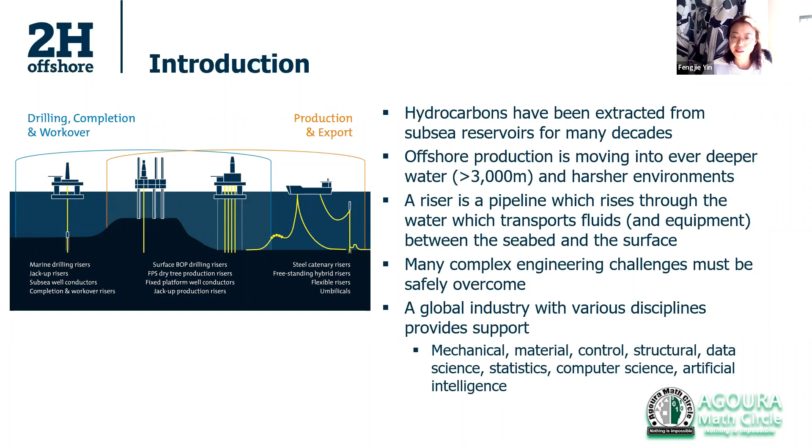Talking about the offshore oil and gas industry, people may or may not have seen some of the offshore platforms. You can see some of the offshore platform pictures on the left side, but I'm pretty sure everybody has used the end product of offshore oil and gas when getting gas from a gas station.

First, the government sells exploration licenses or leases to oil companies, which we call operators. Then the oil company is required to shoot seismic surveys or drill exploration wells within an agreed time frame. And if oil and gas is discovered, the oil companies will normally form partnerships to undertake development.

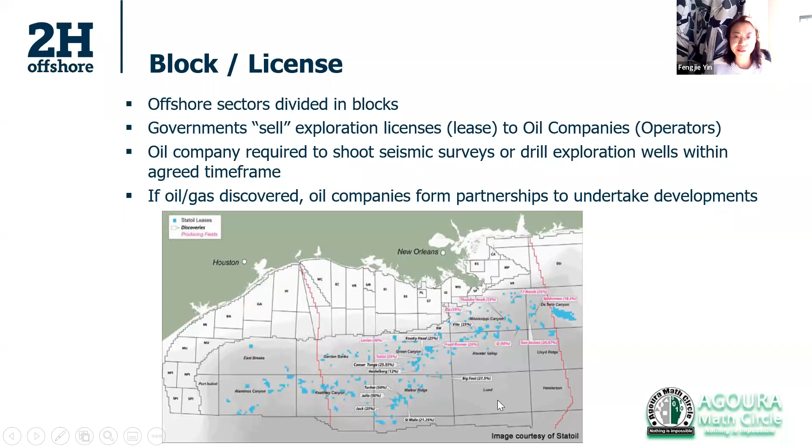You can see the different blocks divided in the Gulf of Mexico area, and the blue dots are the different platforms in this area. You can see lots of development in the Gulf of Mexico.

Talking about basic reservoir geology, although this is not one of my expertise, just a very brief introduction, because this is the very first piece of the jigsaw or puzzle. The hydrocarbons are found in reservoirs beneath the seabed.

It may be some distance below the seabed, and it may spread across a large area. So first, seismic analysis needs to be conducted to identify potential locations which may have oil and gas findings. Lots of math goes into this analysis.

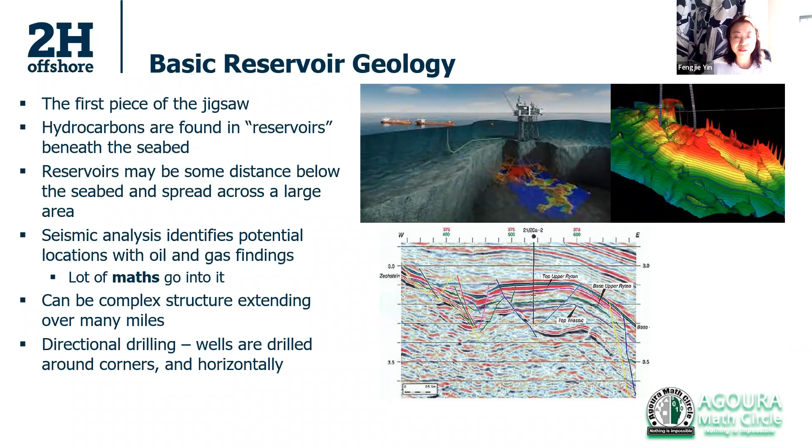It can be a complex structure extending over many, many miles. And currently there is directional drilling, where wells are drilled all around the corners and even horizontally.

Talking about the history of the offshore industry: at first, in the very beginning, offshore wells were first drilled in shallow water in the Gulf of Mexico using fixed platforms, because at the time it was all shallow water. The technology was later extended to the North Sea in the 1970s and all around the world.

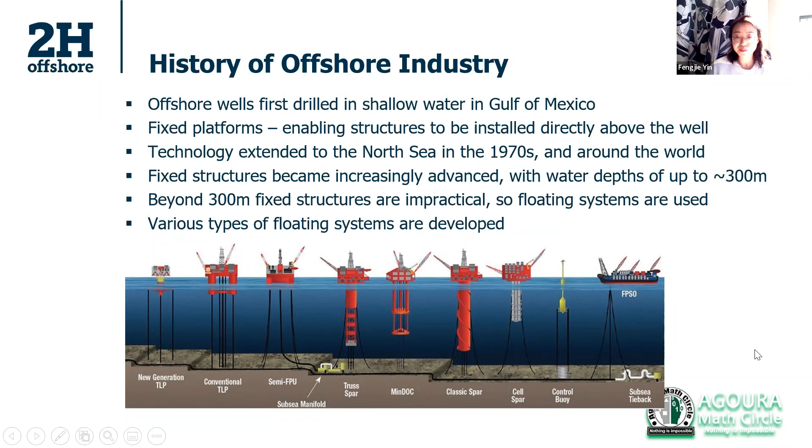A little more about what a riser is, and what my day-to-day life is like working on its design. The subsea riser is a pipeline that connects a well at the seabed to a vessel or platform at the surface.

Now offshore wells are found in locations with deeper water depths, including water depths of up to 3,000 meters, in very severe weather conditions including wind, ocean currents, and wave heights as high as 20 meters. The riser must be able to safely withstand all sorts of complex dynamic loading over the life of the field, as long as it is still producing.

There are normally two stages of developing a subsea reservoir. First is exploration to find oil and gas, and the second is production. In the exploration stage, it normally requires drilling wells below the seabed, typically using an existing drilling riser.

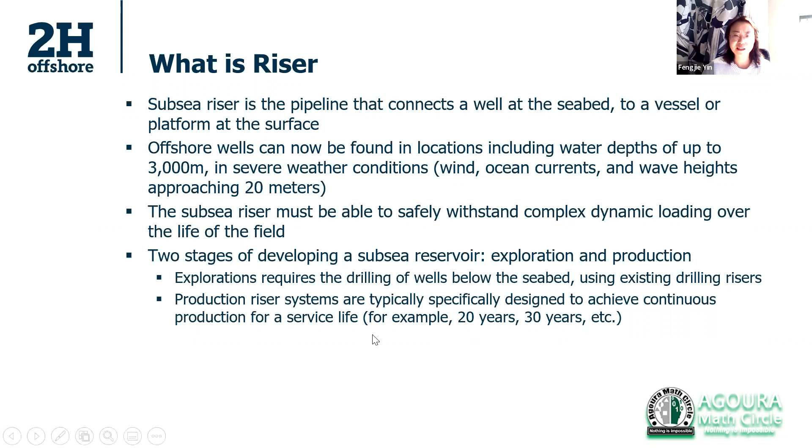I myself focus more on production riser systems, which are typically specifically designed for the specific site to achieve continuous production for a service life, for example, 20, 30 years or even longer.

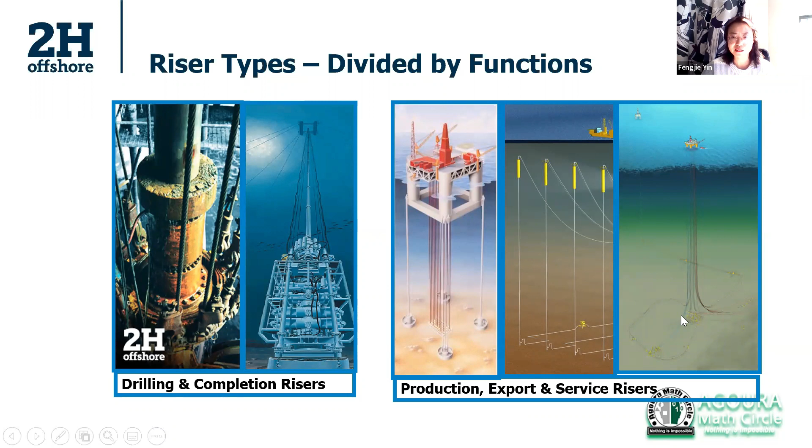There are different types of risers for these two different stages. In the drilling exploration stage, we call it a drilling riser. In the production stage, we have production, export, and service risers, divided by different functions.

To connect to different surface facilities or floaters, there are the regular boat-shaped floaters, called FPSOs, and other types of floaters like TLP, semi-submersible, and spar, each selected for purposes specific to the site.

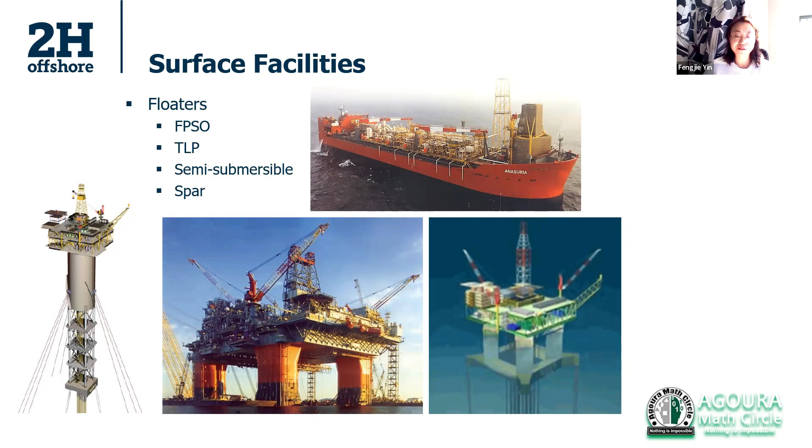There are also different types of production riser systems. One on the left side is the top tension riser, and there's the steel catenary riser or flexible catenary riser, where the shape of the riser is a catenary shape.

Nowadays, a steel lazy wave shape or flexible lazy wave riser is used more and more. Buoyancy is put in the middle section of the riser, which is installed or designed to mitigate the motion transferred from the floater to the touchdown point of the riser on the seabed, helping achieve better strength and fatigue performance.

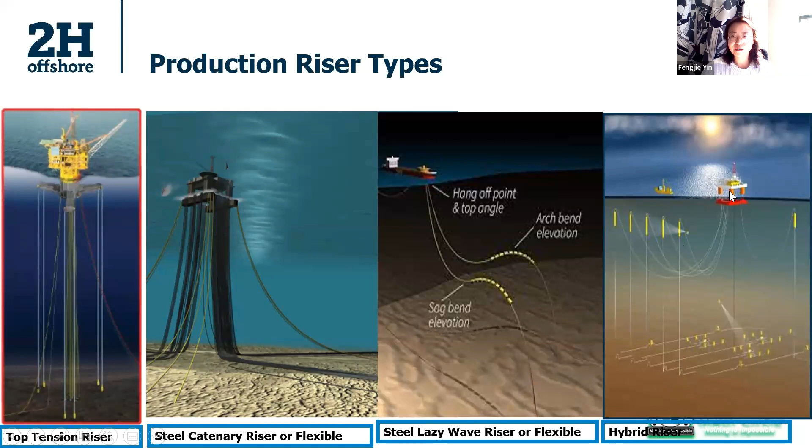There are other types of risers which we call hybrid risers. It's a hybrid combination of a top tension steel part, with buoyancy that can be put in the middle, and a flexible line connecting to the floater.

There are various material selections corresponding to different connections. When we choose high strength steel, we normally use a threaded and coupled connection because welding is not that easy.

There are also welded connections, and there are materials we call flexible pipe, with a combination of layers of steel and composite to serve different purposes.

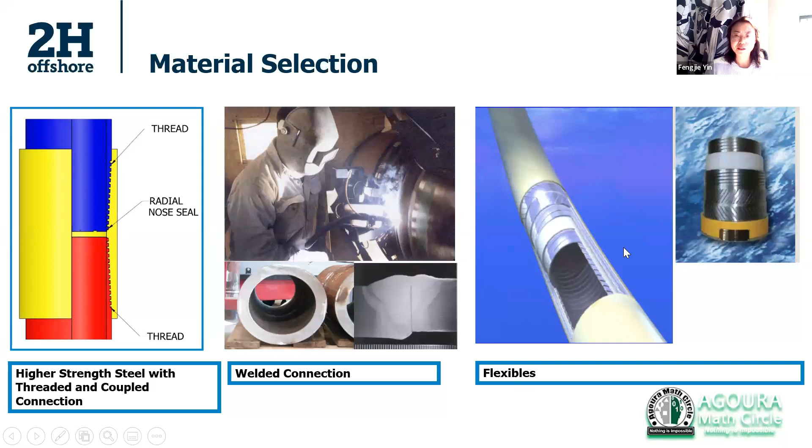There are lots of design challenges in the riser system. First of all, the big chunk of riser pipe will result in significant weight putting on the whole system. And it's a slender, unsupported structure, which is vulnerable to buckling.

And there are also complex dynamic loading, including the environment exposed to wind, wave, and current from metocean data. And the motion of the surface vessel is transferred to the whole system, which may result in high extreme stress and also cyclic loading, resulting in fatigue damage.

Probably you may not know what fatigue is, because fatigue is actually a big concern in riser design. It's easy to explain: if you put a piece of wire, like a metal wire, and you bend it back and forth, this will result in fatigue damage instead of overstress. After a few times, you may see this wire fail because of fatigue damage.

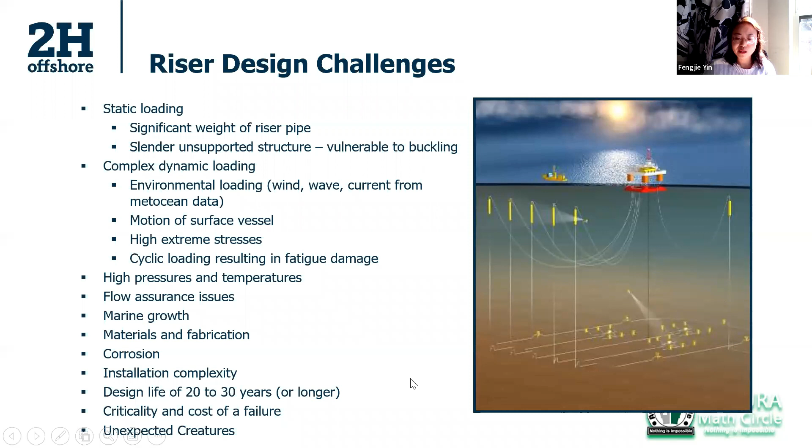There are also some unexpected creatures, which I'm going to show in some of my later slides, which are not designed for.

The key drivers of the riser design, first of all, is the strength behavior. Second is the fatigue behavior, because it needs to withstand the design life of 20 to 30 years, as I mentioned. The fatigue sources may include wave motion and vortex-induced vibration, or vessel-induced motion and slugging, and installation-resulted fatigue damage.

Another key driver that needs to be taken into account is clashing or interference, which needs to consider the riser clashing with the adjacent riser structure, and clashing or interference with the adjacent hull structure or vessel structure.

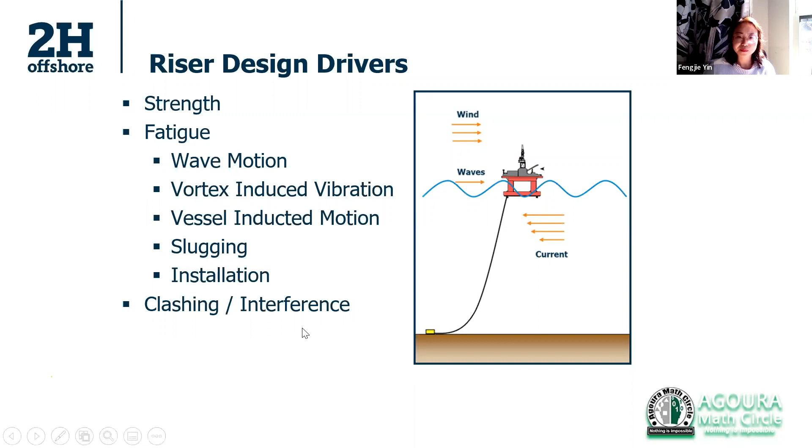What is vortex-induced vibration? In riser design, you may not be familiar with it, but it is basically a slender pipe structure. If you observe carefully the antenna of the car during strong wind, when the strong wind is blowing, the antenna will vibrate perpendicular to the wind direction. So after this, maybe you'll pay more attention to the car antenna and probably notice the vortex-induced vibration. This kind of vibration is a key fatigue damage source in the riser system.

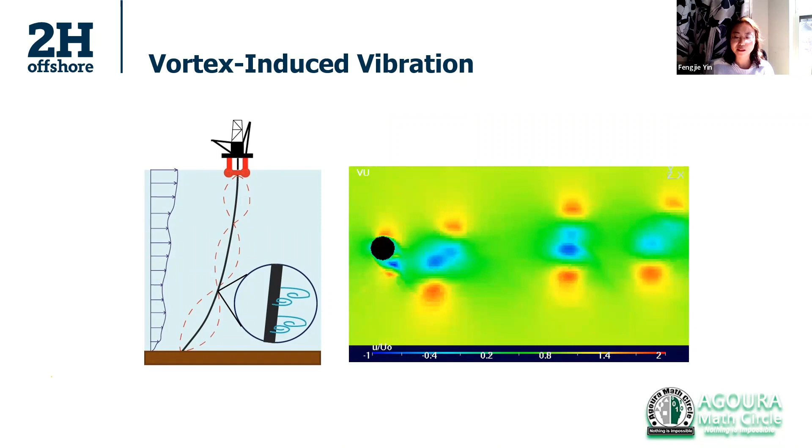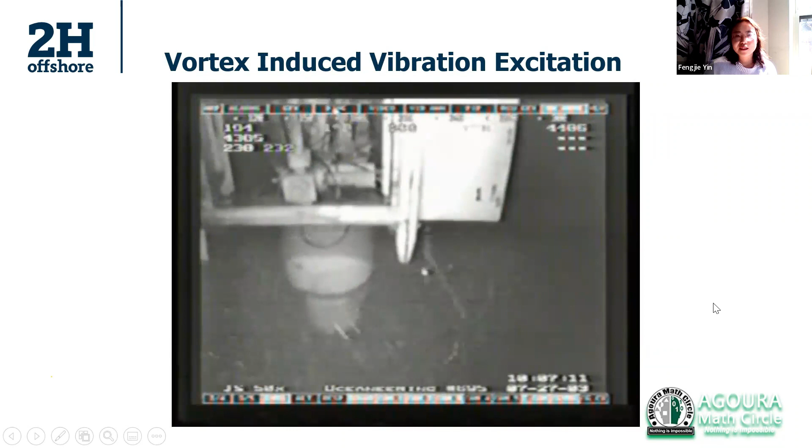This is a video capturing the vortex-induced vibration of the pipe. You can see the motion captured during a strong loop current event in the right conductor pipe system.

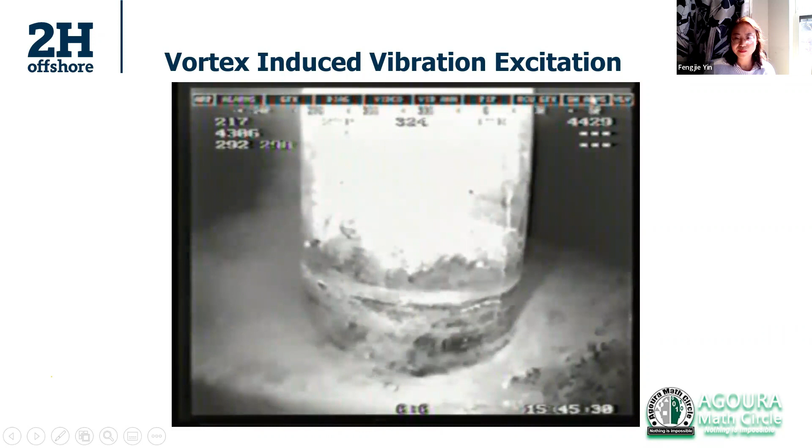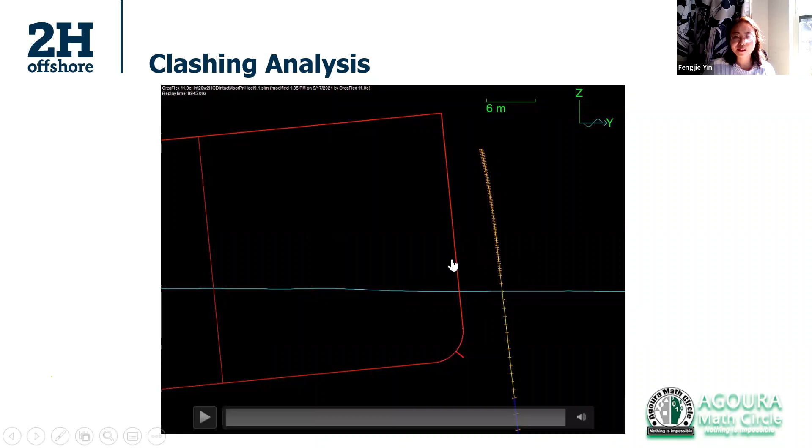And if in any case during design it is clashing during a very extreme event, like a 100-year current event or 100-year hurricane event, if it's allowed to clash, we need to calculate the clashing energy to make sure the clashing energy is below the allowable limit.

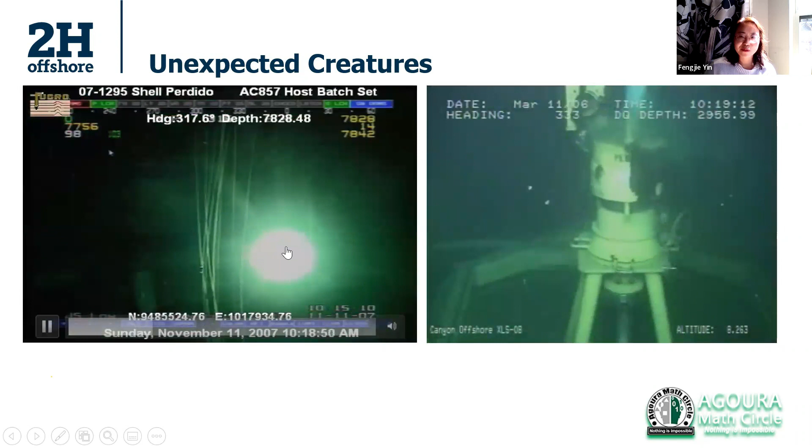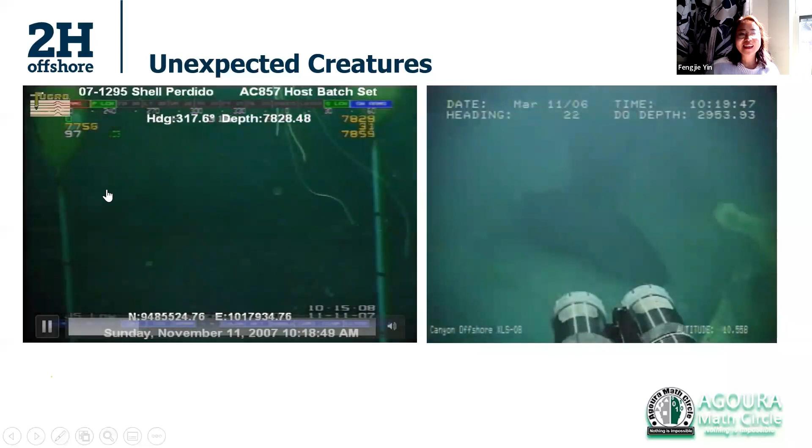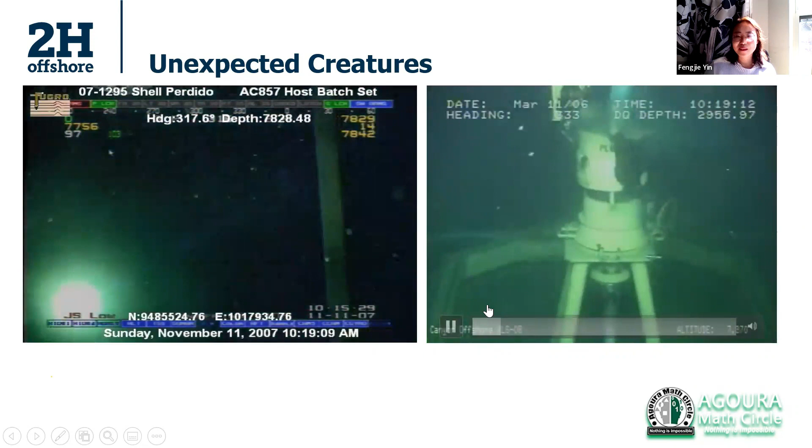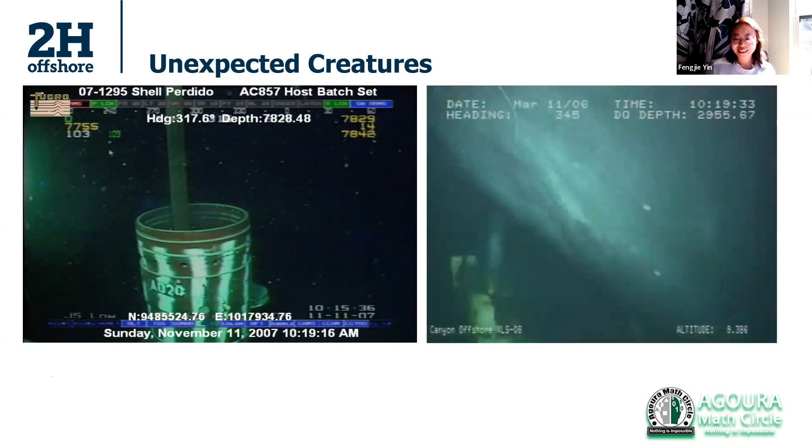Here there are some cool videos. You can capture this with the camera in the whole riser system. I don't know what this is in the water. Can you see this big, huge whale? Yeah, it is a whale, right? And I think in that video... yeah, I think it's a jellyfish. Oh, is it? Oh, okay, cool, nice. So it's good to identify. These creatures are approaching the system. We don't... actually, that's a ray. That's all right, okay. We actually have experienced a whale biting one of the control lines, which they may have thought was food. These are really unexpected things we didn't design for. I also see some aquatic fouling, like mussels. Oh, cool, yeah. Okay.

Moving on to, I would say, the exciting part—for me it's an exciting part—of how we apply this to problem solving.

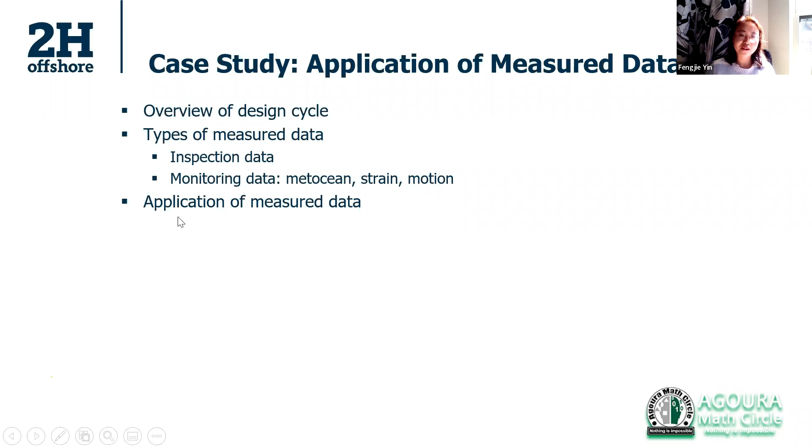First, I will give an overview of the design cycle and the application of two different types of measured data, including inspection data and monitoring data. Monitoring data includes the metocean monitoring—wind, wave, current—and the strain and motion sensor data, and how this is applied to solve the design problems.

Of course, a lot of design work is done at the beginning to get to an as-built design, including different vessel type selection, riser type selection, material selection, and shape, and conducting lots of analysis to make sure you have a robust design before you confirm the as-built design.

But after the as-built design and after installation, continuous inspection and monitoring normally goes on while the whole system is in service. The inspection or monitoring data include general visual inspection, cathodic protection inspection, and inline inspection.

During service, many times monitoring sensors are installed in the system to monitor the environment data, and monitor the strain and stress data. With all this,

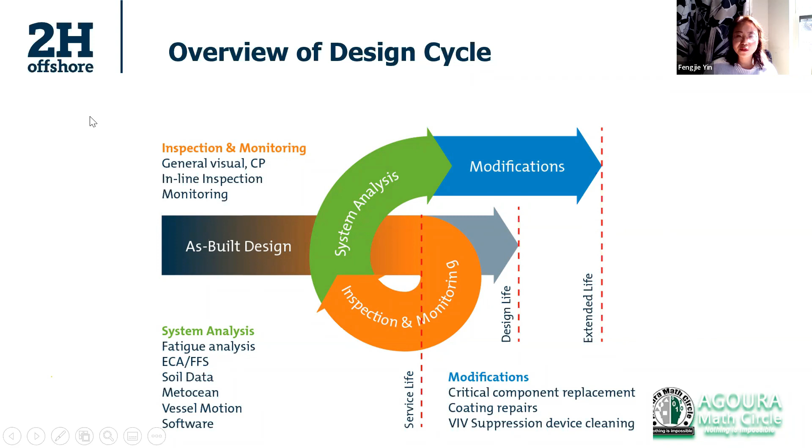And if these modifications are applied, then the update will be analyzed again, feeding into the system analysis to reconduct the whole system analysis and check if the design life is still met, or if you can extend it for a longer life—we call it a life extension assessment. So this is basically how the whole system design cycle works.

So the first case study I put here is a fitness for service evaluation based on inspection data during the service life.

First, how is the problem identified? During service, some inline inspection has been conducted on the infield lines, risers, and pipelines, and the inspection report or inspection results identified various flaws all along the whole system.

So after evaluating all these inspection results, a decision has been made: we need to conduct an assessment to evaluate whether the whole system is continuously fit for service—whether it can still be in service, or if you have to shut down production.

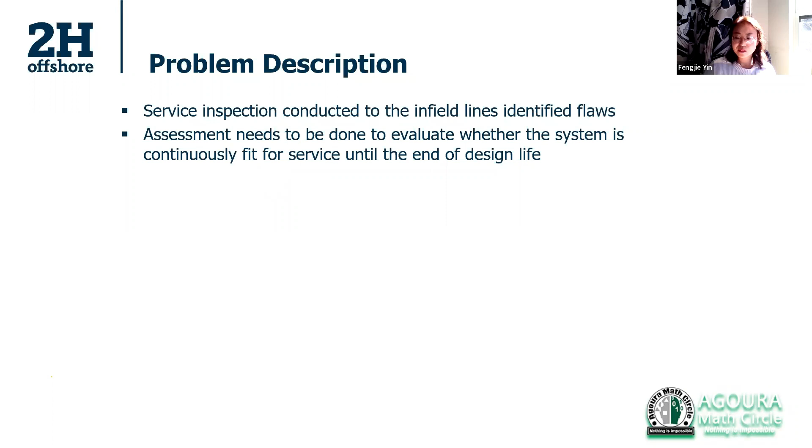And once we get this inspection report, we would normally conduct a detailed processing procedure of the whole wall thickness measurement, to identify key locations where there is larger wall loss compared to the nominal designed wall thickness of the pipe.

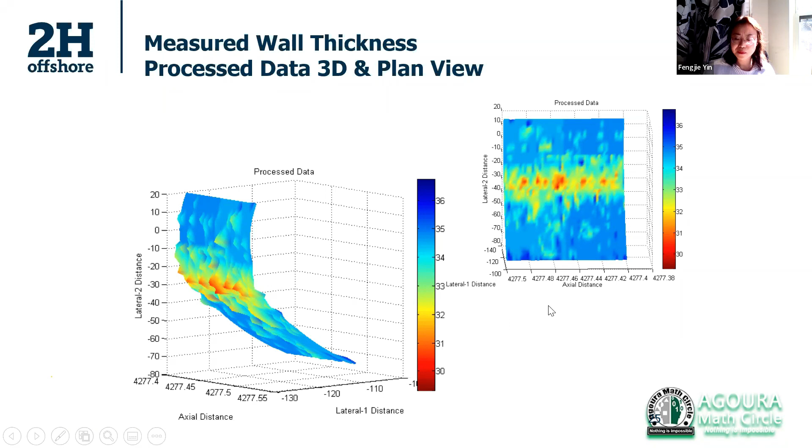However, this is not the only input to the criticality of the whole system along the riser and along the whole circumference, because the wall loss may be severe in some part of the structure where the stress is not as high. Material-wise, if it's at a weld location instead of a parent metal location, it's more critical. So it's basically a combination of location, material type—whether weld or base metal—and the stress distribution all along the whole system.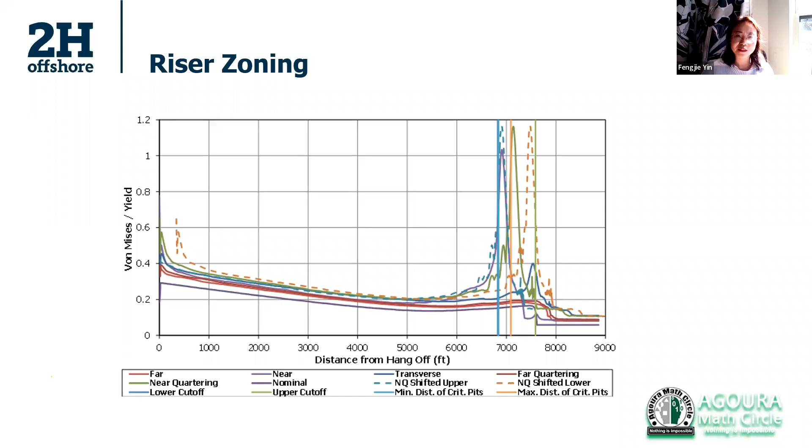Combined with the measured inspection data, we come up with the criticality of these anomaly features of the flaws. Since there are tens of thousands of features identified, we have to identify the most critical ones. After this screening analysis, by calculating the criticality index, the most critical flaws at the most critical locations, with the highest criticality index factor, have been identified.

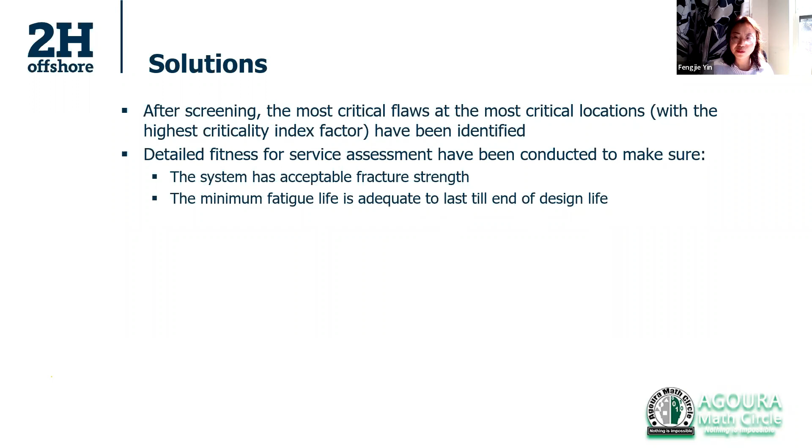For those most critical flaws, we conduct a detailed fitness for service assessment. The objective is to make sure the whole system still has acceptable fracture strength, and by conducting crack growth analysis, we make sure the minimum fatigue life is adequate to last till the end of the design life. By conducting this assessment combined with the inspection data, we confirm the whole system can still last till end of design life, so we can continue to produce oil and gas.

There's a second case study here. In this project, we put on lots of monitoring sensors as part of the integrity management program, and the sensors are put on a riser system, which is a steel catenary riser system.

Why was it decided in the beginning to use these sensors to continuously monitor the whole system? Because at the time this was a kind of new system design, and there was big concern about fatigue and buckling of the riser. This is a bit of an exaggeration of the riser system, but in a very extreme event you can see the movement in the simulation during an extreme storm, and you see buckling has been identified in this area.

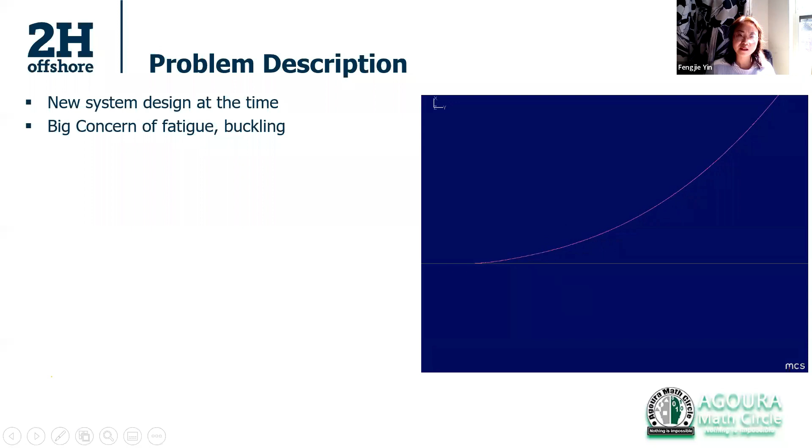Because this was a big concern, the whole monitoring system was applied to the Tahiti infield risers at various locations. Like I explained, the hangoff location where the riser is connected to the vessel and the touchdown point are the main locations of concern, which have higher stress distribution.

The objective of installing this monitoring system, first of all, is to understand the fundamentals, to help designers have confidence in their design, to understand the riser vortex-induced vibration and hull-induced riser response and the riser-to-soil interaction, to support design validation and also support the whole system integrity management program.

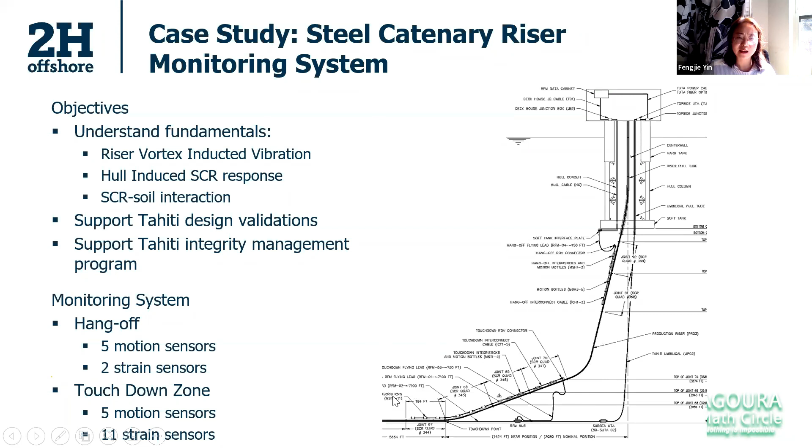The monitoring system installed includes 5 motion sensors near the hangoff location and 2 strain sensors. In the touchdown zone, close to the touchdown area, there are 5 motion sensors and 11 strain sensors installed.

The whole monitoring system is what we call real-time monitoring. The measured data is transferred real-time to the vessel, the floater, and again transferred to the onshore simulation lab. So you can conduct a real-time calculation to make sure there is no catastrophic event causing damage to the whole system, and keep comparing with the key performance indicator to check for an orange alert or red alert for the whole system.

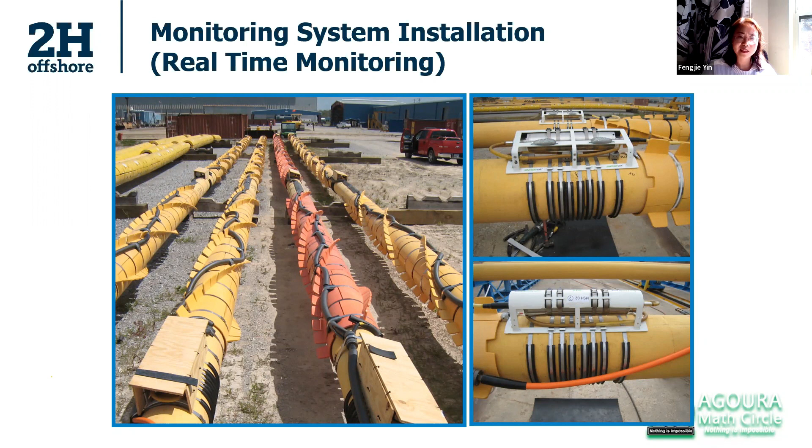You can see the wires here are for transferring the monitoring data, and these structures are what we call a strake, to help mitigate the vortex-induced vibration of the whole riser system. The monitoring data helps identify if this suppression system is working well or not. If something becomes loose during installation, or you lose some of the strakes during service, it can easily be identified by analyzing the measured data.

This is also for the topside data acquisition system, to help compare together. This is one of the results from the fatigue tracking, as I said.

While you measure the real-time stress and strain in the whole system, in the lab there is simulation conducted in real time, calculating at all different critical locations the fatigue damage accumulation overall against different limits, an amber limit and a red limit. When approaching this limit, a warning is sent out and a decision needs to be made. You can see in this system it's far away from the design limit, which confirms the design is robust and can continue in service.

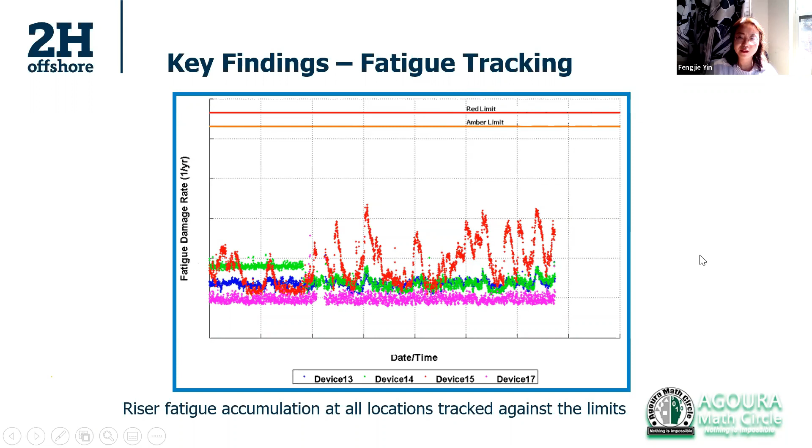If you see in high current that the riser response is shooting up, it means you may be losing some of the VIV suppression strakes and might need to reinstall these during service.

Overall, for this problem solving, the conclusion of this project is that the measurement is conducted to provide feedback to confirm the riser integrity, the whole system integrity. The analysis of the riser response shows all measured parameters are below any concern limit, which validates the whole riser design process. Again, the measured data and calculation are very critical input for life extension.

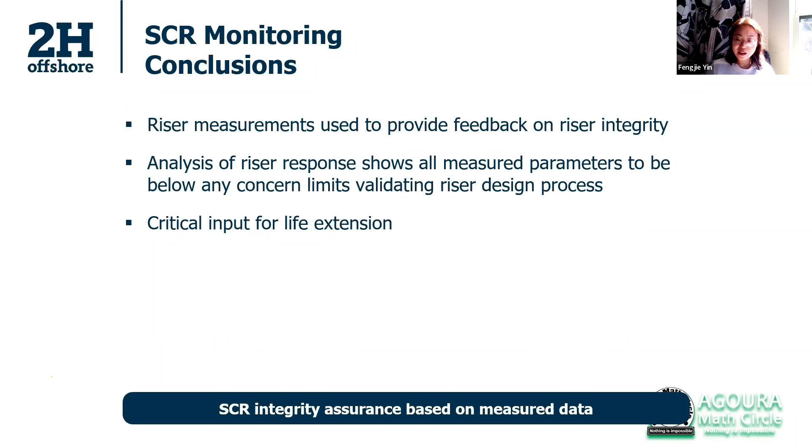So Dr. Yin, there is a question in chat, and you may have addressed this through your presentation, but I will read it out again. How do these floaters last? If they last long, what is an approximate of how many years it would last until you have to change one? To what, last? The floaters? Oh, the floaters, yeah. Right.

The floaters are also designed, so the whole system needs to be designed consistently. If your riser system is designed for 20 years, then the floaters also need to be designed for 20 years. So it's a consistent whole system design. And even for life extension, if you want to extend it for longer life, the floaters need to be assessed again to make sure they will meet the extended life. The whole system needs to be consistent. It's not like you check the riser system can last longer and the floater doesn't last that long. Then your design life will be the shorter of these two systems.

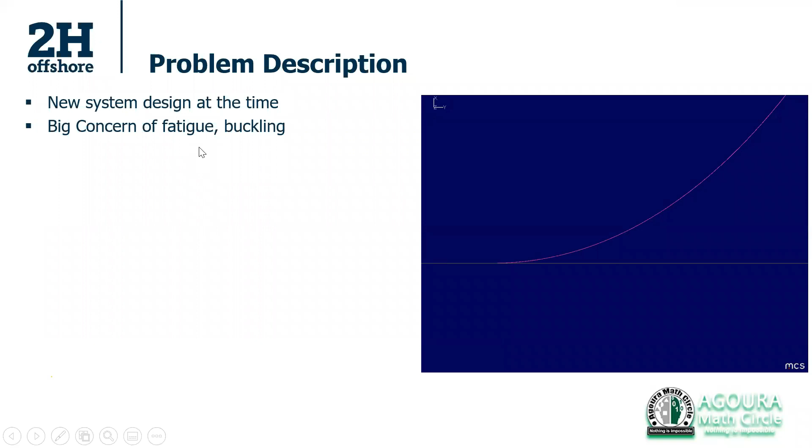Let me directly talk about it instead of showing my introduction page. How I got interested in mechanical engineering is, when I was in high school, my father always took me to his office, and he is a geologist. He used to be a geologist, and later on he converted his career to be a design engineer. So he has both a geologist and an engineering background. In his office, this was the first time I was exposed to the engineering field.

And then in the college entrance examination, we have to select what major you want to be in, and at that time, I thought engineering. I really want to go for the engineering field. Actually, without knowing exactly what mechanical engineering is, what it is in the daily work, what it's about.

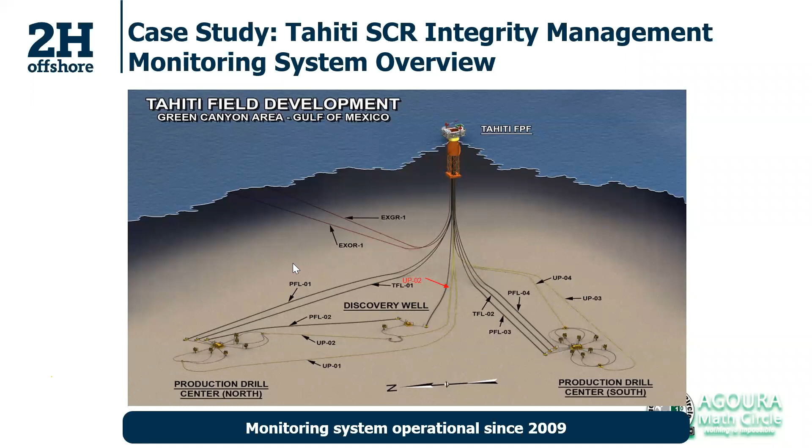Yeah, I actually don't understand how the riser was actually made. It's pretty cool to see the image. I know that you put a lot of hard work into it, but I don't know how exactly we make it. It's really nice. So I just want to know how the riser is made.

Yeah, so for the riser pipe, we need to select different vendors for high quality to produce high quality steel if it's a steel riser. And if it's a flexible riser, there are currently very limited vendors which can produce flexible risers with track records. There are, I would say, maybe 2 or 3 vendors which can produce the flexible pipes.

And for the riser pipe, there are different vendors, but there are connections of the riser pipe to the vessel too, including different - we call it titanium or steel stress joint to connect to the vessel, or use a flex joint connection to the vessel. There are also different vendors for those connections. And also if you use a high strength material, the connection uses threaded and coupled connectors. There are other vendors for that.